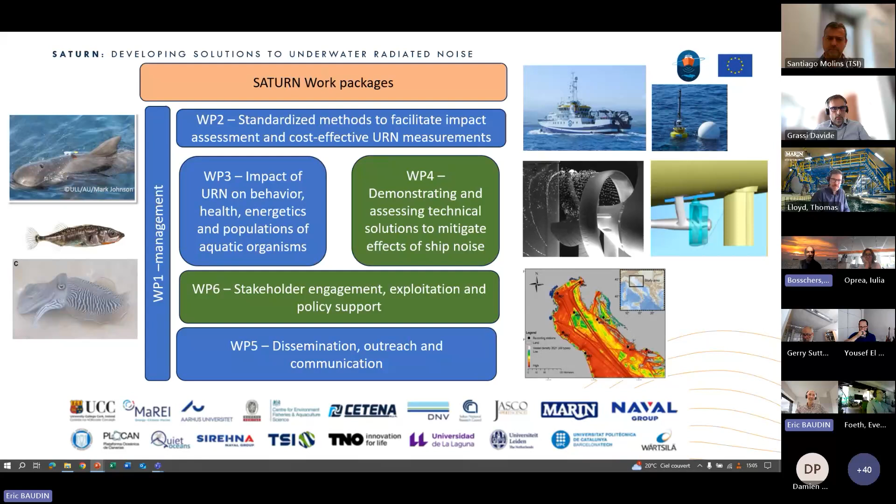I'm senior researcher at MARIN, and I'm coordinator of work package 4 in SATURN on the technical mitigation solutions. This work package consists of 7 tasks, of which we will only address a few in this presentation.

Task 4.1 is on the mechanisms of underwater radiated noise. This research tackles two topics. The first is an experimental study in the cavitation channel of the fundamental physical mechanisms underlying propeller vortex dynamics and associated sound emissions, for propellers in open water condition and in-behind condition. The second topic is a computational study of propeller sound emission of a ship in a maneuver, showing that it's especially the speed loss that leads to an increase in radiated noise.

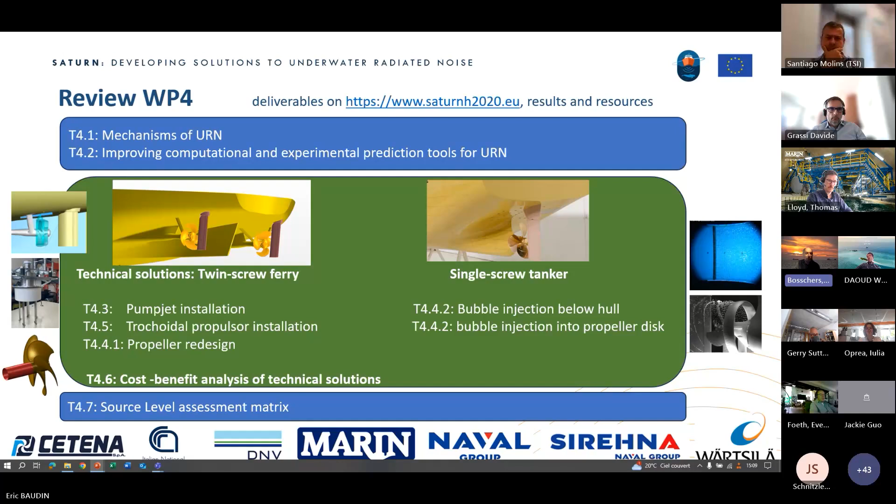We have decided that each technical mitigation measure will be presented by the person most closely involved in it. First for the twin screw ferry, then for the single screw tanker. In addition, some of the technical mitigation measures were also analyzed in work package 6 by a noise mapping study, and two sheets on that will be presented by Eric. This presentation will finalize with the cost and benefit analysis, but we will start first with the presentation by Davide on the design and analysis of the pumpjet propulsor.

Yes, thank you Johan. Good afternoon everybody. I'm Davide Grassi from Cetena Fincantieri. I'm a naval architect in the numerical naval architecture department, mainly involved in propeller and hull optimization.

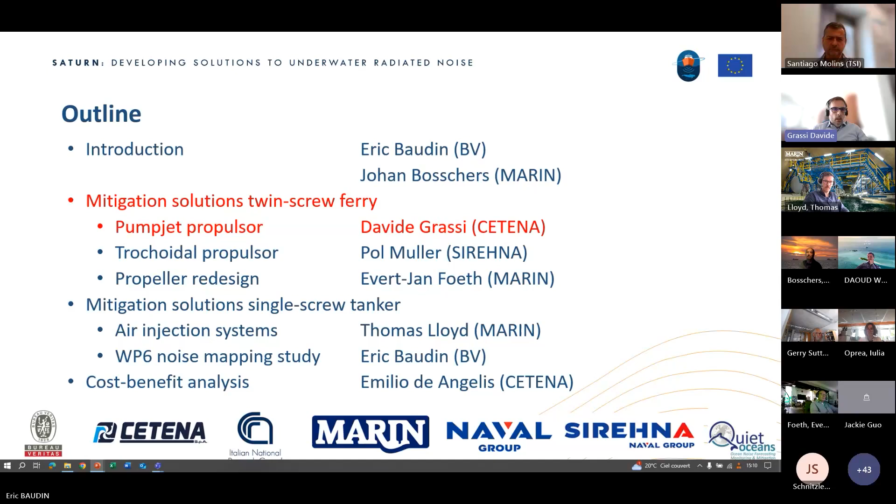Today I will present the pumpjet retrofit design we made for this project. The goal of this task is to design a pumpjet that can be used as a retrofit for the existing propeller installed on a test case ferry ship. The idea is to use a system-based design optimization tool to design the shape of the different parts of the pumpjet, and then analyze and compare both the original propeller and the pumpjet geometry through dedicated CFD analysis and model tests.

With regard to the model test, we performed all these experiments in the large cavitation channel of CNR in Rome, Italy. The scope of this experiment was to evaluate the performance of the original blade and the pumpjet, but also the wake flow, the cavitation pattern, and the emitted noise.

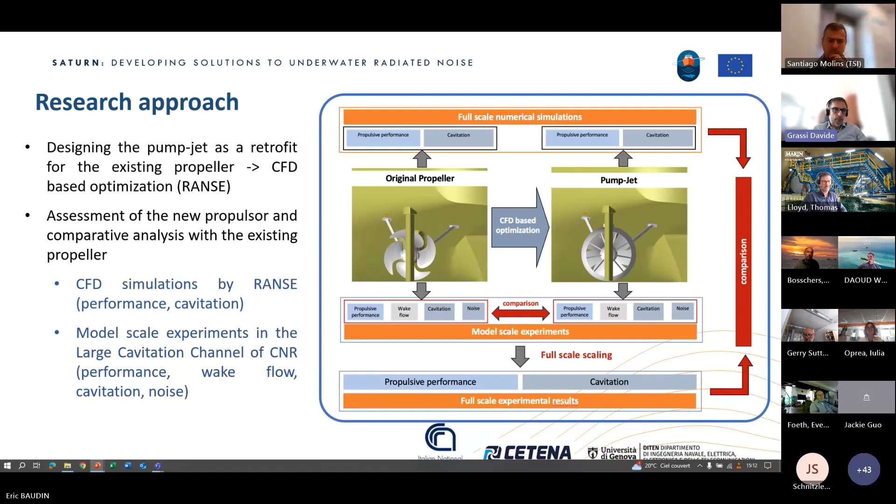Through the CFD analysis, we have the chance to compare the original blade and the pumpjet in full scale, whereas through the experiments we got only model scale results that needed to be extrapolated to full scale.

A few words regarding the design loop applied for this case. We started from a combination of available sea trial data on the existing vessel and model tests. We made preliminary activities, like 3D CAD modeling of the hull, but also preliminary CFD analysis, like the bare hull resistance analysis, which allowed us to use these results as input for the design of the pumpjet.

Besides this, we need to choose a layout of the pumpjet, because for this propulsion tool we have many options. For example, we can go with an accelerating or decelerating duct. In the first case we can gain efficiency; in the second case, by reducing the flow field at the rotor tip, we have the chance to reduce the emitted noise.

We can also choose between a rotor-stator or stator-rotor configuration, meaning the rotor is in the front part of the pumpjet or in the rear part. We decided to go with the rotor in the fore part, upstream of the stator, because this allows us to install the pumpjet more easily on the experimental facility.

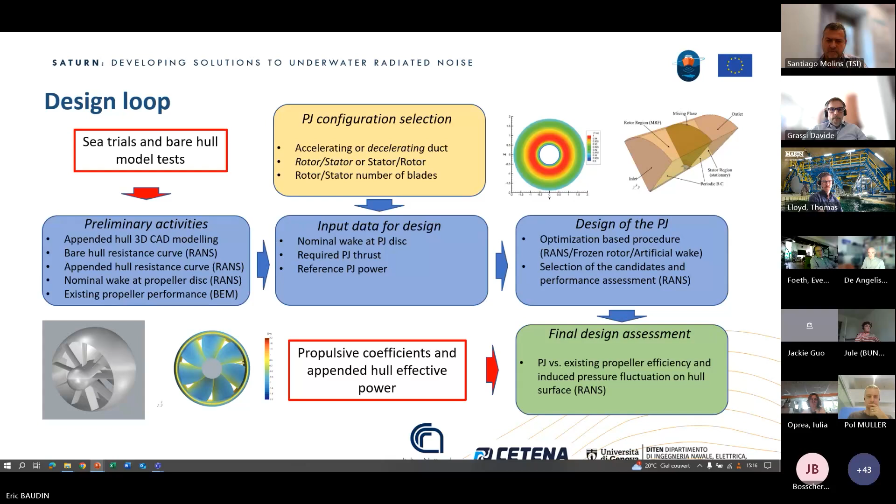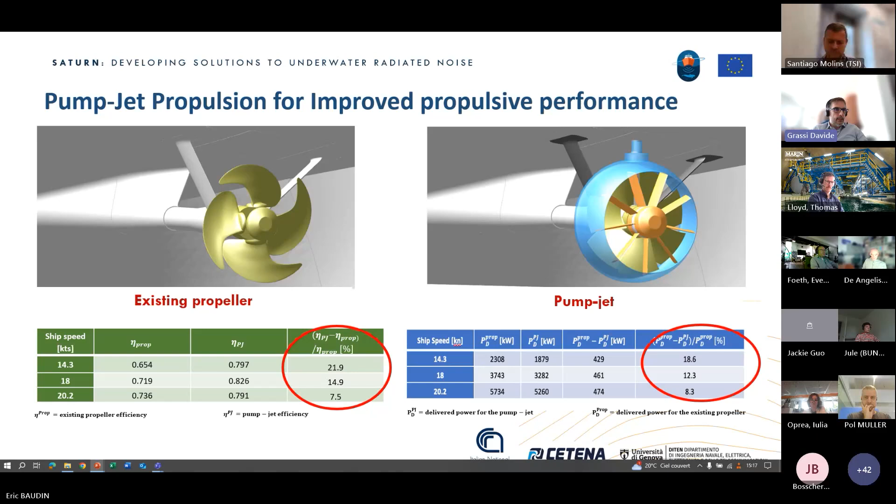We also have to mention that for the lowest speed, the comparison is made with the original propeller running at constant RPM with a reduced pitch. That means that in some way the efficiency of the propeller has a penalty, but we have to say this is the way the ship owner operates this propeller. Next slide, please.

If we have a look at the experiments at the Large Cavitation Channel in Rome, in terms of cavitation pattern but also emitted noise, it's clear that the cavitation pattern of the rotor, in this case, is reduced in comparison with the original propeller.

And if we look at the spectrum of the emitted noise at the 3 speeds we considered for the study, 14, 18, and 20 knots, it is clear that the pump jet shows a reduced level of emitted noise. In this plot, the dotted lines relate to the area where the background noise of the experimental facility is above the measured noise, so in this range of frequency it's not possible to make a comparison.

But in the other region, we have a reduced emitted noise spectrum, except for the high frequency at the highest speed, where the red line, the pump jet line, is above the original propeller. In this region, the idea is that the cavitation coming from the rotor interferes with the stator downstream of the rotor, causing this increase in noise. So we think that in a further study, it's possible maybe to optimize a little bit better in this area.

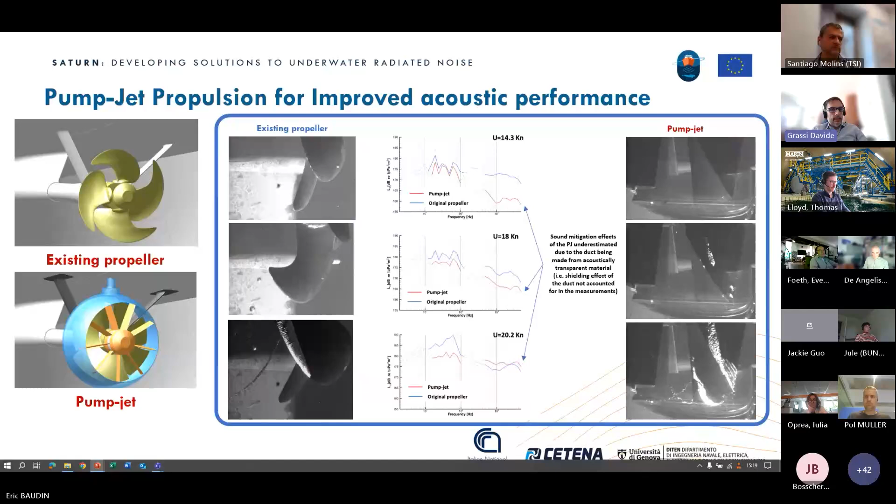Next slide, please. So to come to an outline of this study, the range of ships on which we can apply this kind of solution are, of course, passenger vessels, but maybe also other types of ships. With regard to the effect on emitted noise, we got a reduction up to 15 dB, especially at medium frequencies.

We also have a significant effect on the efficiency of the propulsion system, where we have from 7 to 22% higher propulsion efficiency and from 8 to 19% reduction in power consumption. We think that the technical maturity of this device is quite high, even though we know that this study was only focused on the hydrodynamic part and requires also a mechanical study to be installed on board.

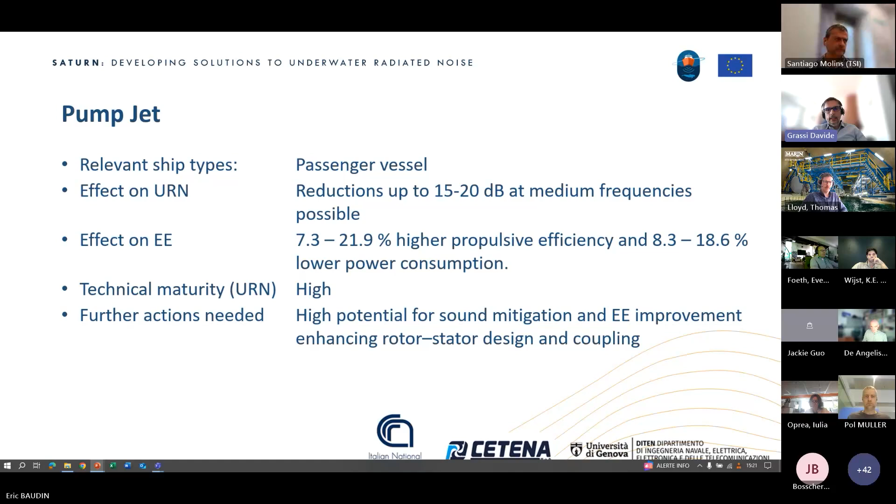With regard to possible further studies, as I mentioned, it will be possible to improve the design of the rotor-stator interference to decrease the noise emitted at high frequency and high speed. That's it from my side.

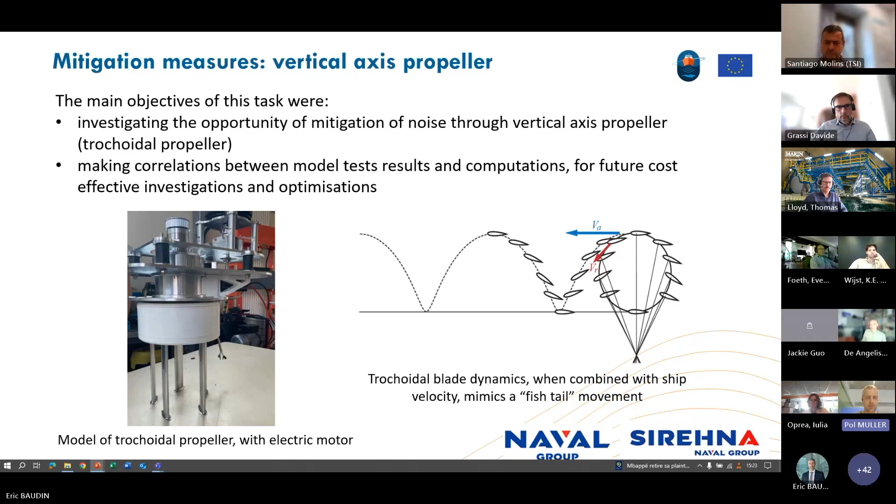This kind of vertical axis propeller is, as the name suggests, vertical axis. You have a view on the bottom left. The blades are vertical and rotating around the vertical axis. Each blade is also rotating around its own axis, and the electric motor is supporting the whole blade assembly, turning around pretty much like a propeller.

When you combine the velocity of the ship with the kinematics of each blade, it produces a kind of fishtail movement. Each blade moves like a fishtail into the flow, which is quite different from a classical Voith-Schneider propulsor system, where the blades are sometimes reversed in the flow, compared to this one, where the leading edge is mostly towards the upstream flow.

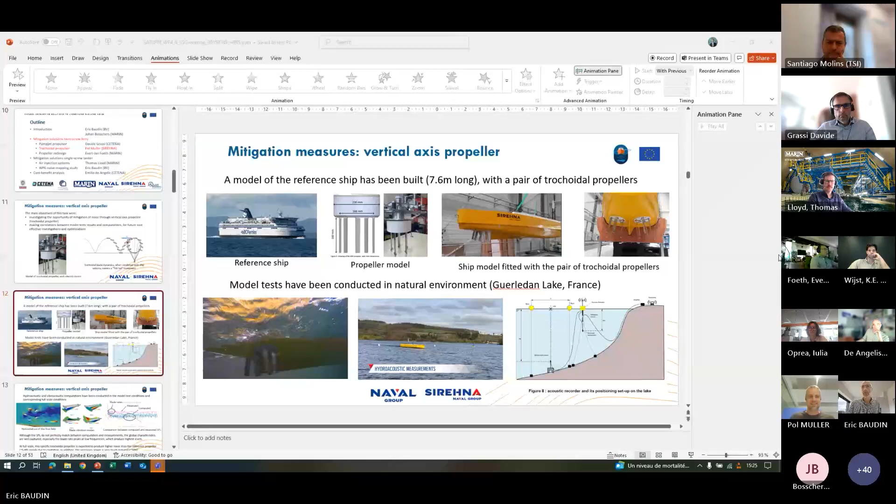Next slide will be difficult to see. Eric is not there. No, I'm there, you don't see me? Oh, I cannot see the presentation, by the way. Can anybody see the presentation, or am I alone? Is it back? Yes, it's back. Thank you very much.

This is what we did. We started with the same reference ship as Davide presented before, and we built a model of this ship 7.6 meters long. We removed all the necessary stuff for the classical propulsion system: the shaft line, the brackets, the rudders.

I have a terrible echo.

We fitted the propeller, the vertical axis propeller, below the ship. The white part you see from the propeller system is the gear system, because it's fully mechanical. There is a single electric motor, and the movement of the blades is completely controlled by the gearing system. This white box is mounted flush to the hull, and then the blades are rotating in the water to produce this fishtail movement.

So we've been testing the model in a lake, a natural environment, and we've been able to measure the noise produced by the ship and the propellers.

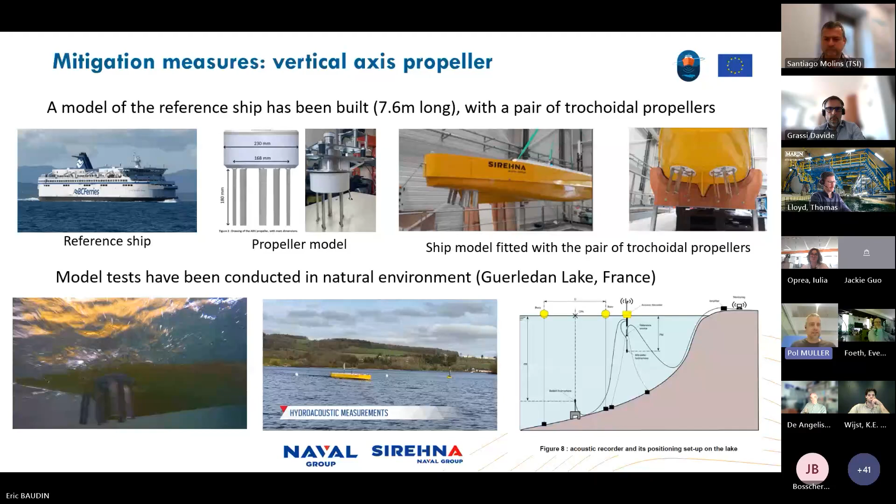This was the first part of the job, and the second part was the numerics. On the next slide you can see what we've been doing. We started with hydrodynamics computations. You can see on the top left corner the horizontal cut of the flow field, crossing the blades, where we can see some nice flow separations.

We've been computing the power consumed by this propeller, its efficiency, and the hydroacoustics of the propeller, plus we've also been computing some vibroacoustic noise, with blade vibration modes computed plus excitation through the boundary layer of the flow on the blades. These three components of the noise are displayed on the right.

The purple line is the noise measured in the lake. The blue line is the pure hydroacoustic noise, and the red and green are the vibroacoustic noise. The main difference is that we don't take cavitation into account in this case, and we did not expect a lot of cavitation in the model, but there was some cavitation, so the noise does not perfectly match.

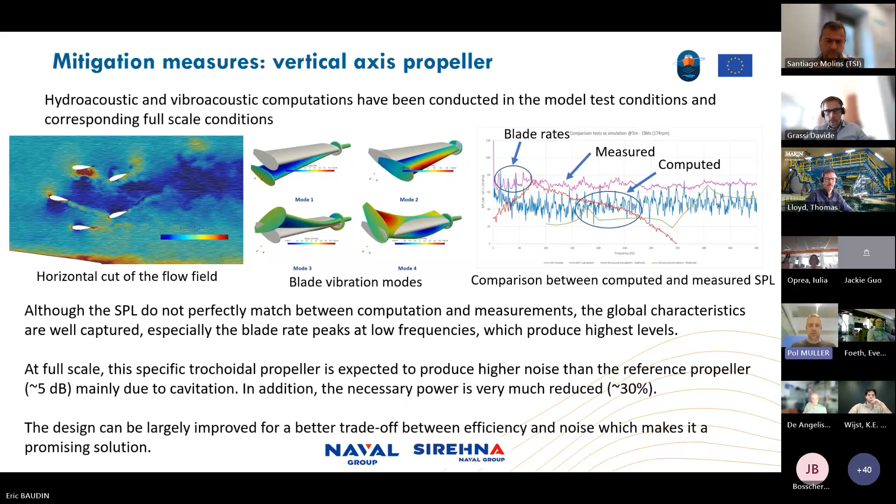So the idea for next is to make a better trade-off between efficiency and noise, because in this case it was a bit more focused on efficiency than noise, this specific design. What we expect is that this is quite relevant for twin screw vessels, because we need a relatively flat part of the ship to install this kind of propeller. So for single screw, it's not fully efficient or fully adapted.

The effect on URN: in this case it's somehow close to plus 5 dBs, but we expect that with a better design we could achieve minus 5 dB. And in this case we have a 30% gain on power consumption, which is quite large.

As you saw, it's still not fully mature. So we still have to make some improvement on the design, specifically for noise. So focusing on a better trade-off between efficiency and noise is the next step for this kind of propeller.

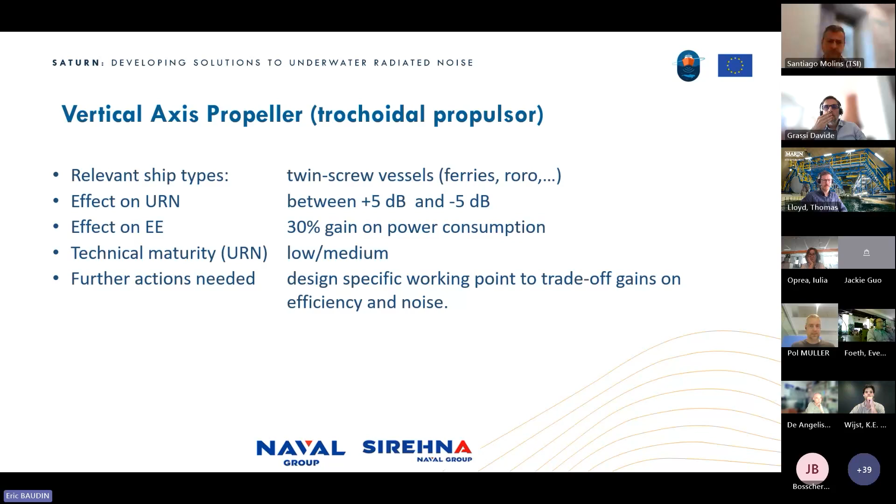Yes, good afternoon everyone. My name is Evert-Jan Foeth. I work as a researcher at MARIN, and I've been working on automated propeller design and optimization for a while. I'd like to present the results for the optimization study where we're trying to balance the efficiency versus the underwater radiated noise properties of the propeller.

The background is that we have two goals, and we are trying to balance these two goals, meaning that you cannot minimize both. One will impact the other. So we're going to balance these, and we use multi-objective optimization algorithms. These are algorithms that are ideally suited to balancing various goals against each other.

We also add a number of constraints, and one of these constraints is the low risk of cavitation erosion. Top right you see a propeller blade which has not been designed well, where the cavitation has eroded away part of the blade surface. So we definitely want to avoid this.

With a few tools - the main tool is the propeller analysis tool called Procal. That's what we use for day-to-day analysis. It's an inviscid method, so no boundary layers are calculated, but you do get a very good estimate of the thrust and efficiency of the propeller and the cavitation extent within several minutes to half an hour.

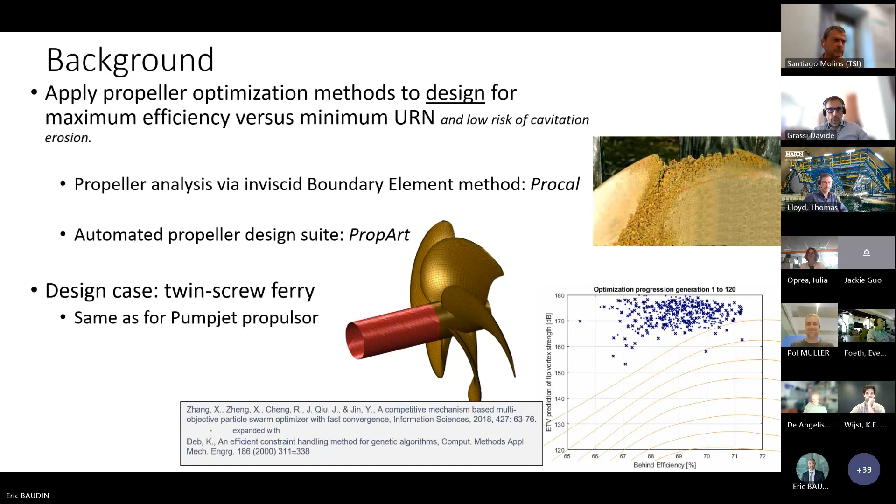And then for SATURN, we also added a parametric hydrofoil function. Normally propellers are typically designed using stock sections, NACA sections, for example NACA 66, very popular, very good cavitation properties. But we also know that depending on the flow behind the ship and other properties, you can tailor the sections further. So we applied a parametric model with 11 parameters per section. The number of parameters for the propeller is quite large - I think we use 50 to 60 design variables, plus this custom section design.

The only thing we do need is to add a flow separation risk estimator, because the code cannot handle that. So this was also added. When we're venturing too much into areas of flow separation, the propeller will give a penalty from the optimizer, and it will be optimized if all goes well.

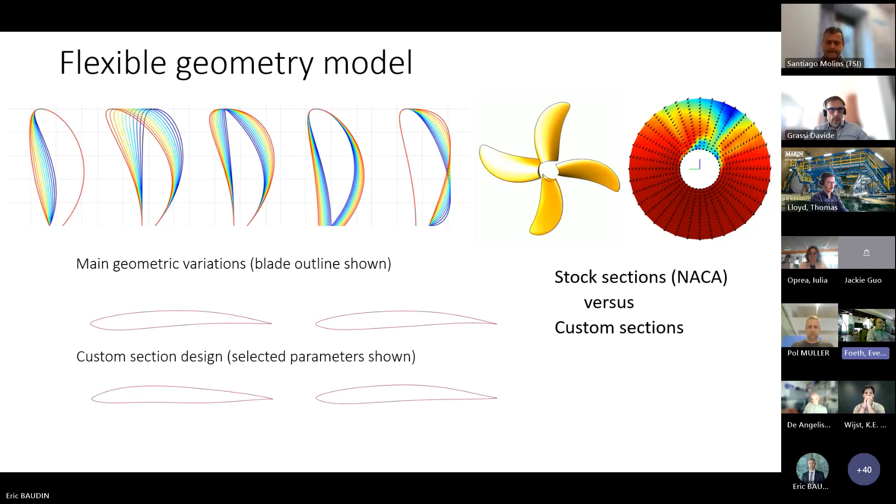Within SATURN, we added several source level estimation functions to estimate the overall source level of the propeller. Each of these functions ties into a specific form of cavitation or noise source. For sheet cavitation, we have the NAVAIS model, a broadband source level estimation model that responds mainly to the entire area of cavitation under the propeller blade. So if you want to reduce it, you need to reduce the cavitating area.

Then we have a tip vortex cavitation model developed by Johan Bosschers. This model depends largely on the tip loading of the propeller. If you want to reduce tip vortex cavitation noise, which is often a dominating contribution, you need to affect the tip loading. And if you affect tip loading, you move away from the ideal loading of the propeller, and your efficiency will suffer.

Then my colleague Eric added a blade rate noise model. This also acts on the sheet cavity, but not on the area, specifically on the dynamics. So it's a more direct method.

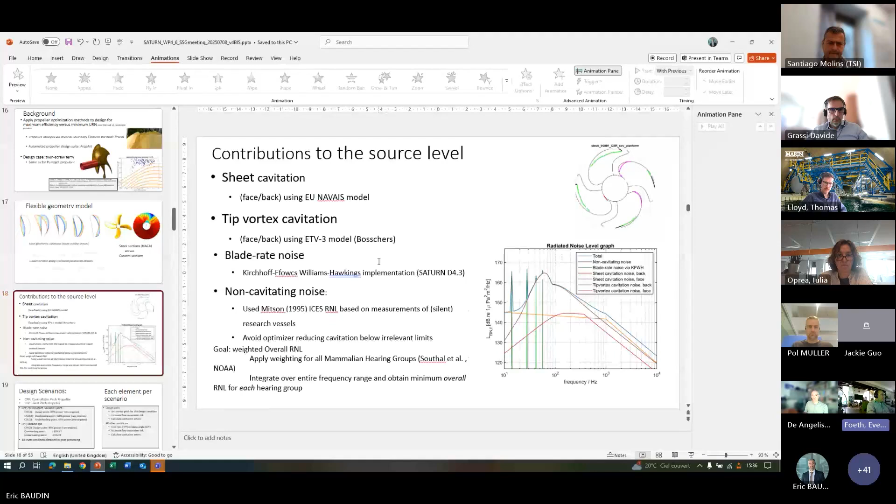And then we added a non-cavitating noise contribution, the Mitson model. This is basically a baseline for machinery noise of research vessels. We added this because we thought we perhaps do not need machinery noise models, since cavitation noise is always louder than machinery noise. But the optimizer was so aggressive in reducing cavitation noise that at one end of the spectrum the cavitation contribution was always lower than the machinery noise. Then it would spend too much time reducing that noise further, even though we were already quite happy.

So we needed a soft landing for the optimizer. That's when we say, well, if you're below engine noise, there's no need to be less efficient. This is why we use this Mitson model. Nowadays we use the PIANO model developed by Jasco, DW Consult, and MARIN, where you can add specific machinery noise components, but that model was not available in time for the SATURN project.

Once we have the entire source level graph, we change this to a radiated noise level. Then we weigh the overall radiated noise level by weighting groups for various mammalian hearing groups from Southall and from NOAA, for example baleen whales up to harbor porpoises and so forth. Then we integrate everything and get an overall radiated noise level for these hearing groups, and we minimize the loudest outcome.

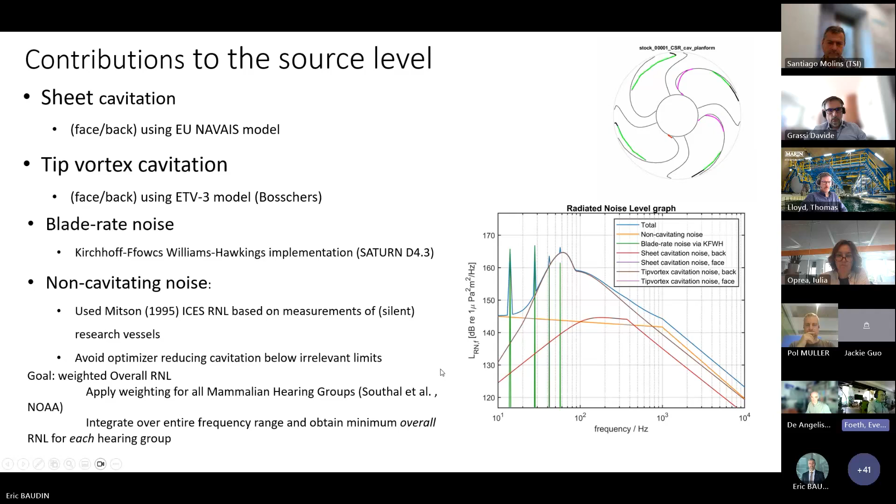Now everything is applied in all these calculations for each propeller that we design, in several design scenarios. We analyze the controllable pitch and fixed pitch propeller. The ferry is fitted with a controllable pitch propeller. Then we have several design conditions: the ordinary service speed, where it uses two engines and runs at 85% power, the continuous service rating, but it can also go to its maximum speed of 20 knots, using both engines.

We also added a winter condition, where ferry speed demand is less, one engine might be turned off, and we go to 85% power, meaning the controllable pitch propeller's pitch is reduced, introducing the risk of pressure side cavitation, which is added as a constraint. For the fixed pitch propeller, we have comparable conditions: 85% power, basically the continuous service rating, 20-knot condition. We added two conditions with over- and underloading to ensure the design is robust. This ferry will probably not operate at these points, but it's just common good design practice.

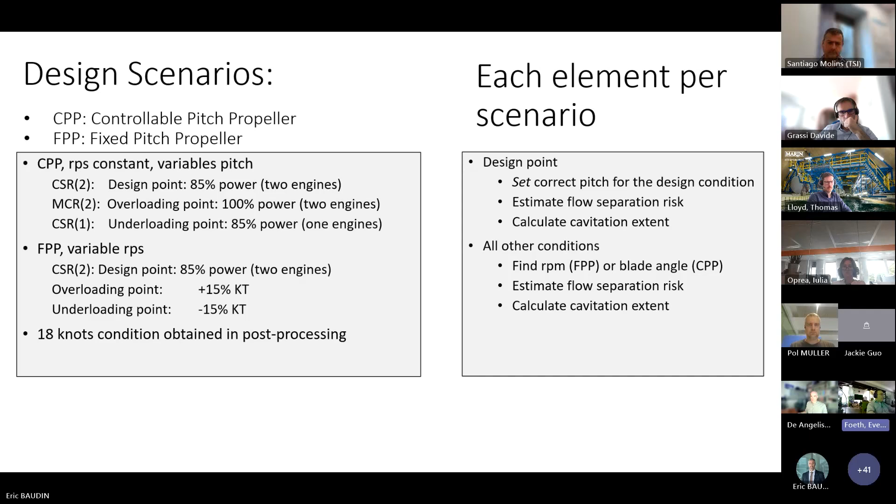And then we do a number of calculations. I think we do 9 calculations per propeller, and then we do 6,000 propellers for each scenario.

So this is the result of one of these scenarios, the 4-bladed controllable pitch propeller. The original propeller also has four blades, and this is the last generation. When all is said and done, we get the Pareto front, which is really the boundary in your design space, telling you that you cannot improve your efficiency any further without giving up some of the radiated noise levels. The black dot on the left is the reference design. For the same efficiency, I only win 1 dB, which was fairly modest at first.

We can also not make the propeller worse to reduce the noise further, because then we go to the off-design condition where there is pressure side cavitation, and we cannot combine these two conditions. So the low speed pressure side condition and the maximum speed condition box in your design space, and you have no more room.

We also analyzed the reference propeller, and we found that it has this magenta outline that is face side cavitation. So this is an older design that suffers from face side cavitation. It's not something that you would do anymore. This propeller has been replaced meanwhile.

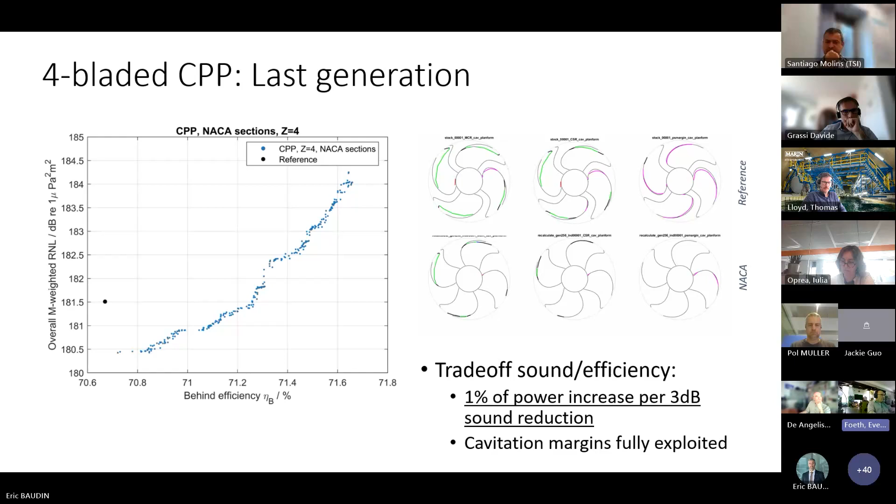We also find that if you want to reduce your overall noise levels by 3 dB, you have to sacrifice about 1% of your efficiency, so that will cost you 1% of power increase. At first we were careful and would say this only applies to this particular ferry. But this relation, 1% power for 3 dB of sound reduction, we have now found in 4 separate studies, also for a single screw container vessel and a chemical tanker and so forth. So as a rule of thumb, it's a good indication.

Now here's the Pareto diagram where we have 4 of these scenarios in one graph. The blue one is the same one I showed you earlier, that is for the controllable pitch with 4 blades. If you go to a 5-bladed propeller, the optimizer is immediately able to add 1.5% of efficiency without sacrificing anything in noise. The orange and red dots are the solutions for the propeller where the section design was also varied.

We see there is a massive increase in your design, the design space is used much better. So you can drop almost 10 dB for the same efficiency, and you can also increase your efficiency a lot more for the same noise contribution. So within your design space, adding this custom section design offers you a lot of space.

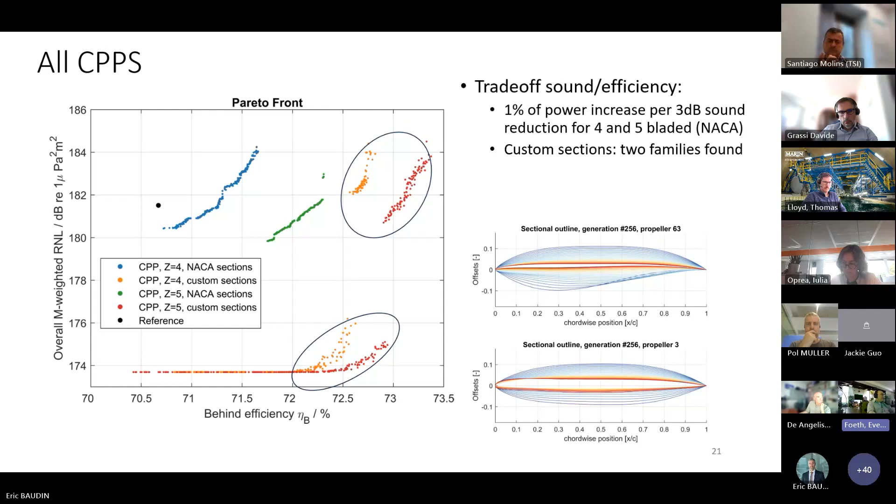Now I showed you that we only had a 1 decibel increase or reduction in sound levels for the same efficiency, but that was for 20 knots. When we look at the 18 knots condition here at right, we see that even with the NACA section, the optimizer is able to shave off 6 dB of noise, and a lot more for the custom section design. Unfortunately, we found out that the blade mass at the suction side of these sections has more than doubled, so you would not be able to simply replace the blade and put on a new one, because then it would exceed all the manufacturing and safety tolerances of the hub.

However, for such a future design where you want to really exploit the entire design space, if you would use composite materials that have no such weight restriction, then you would be able to make a much quieter propeller with no loss of efficiency.

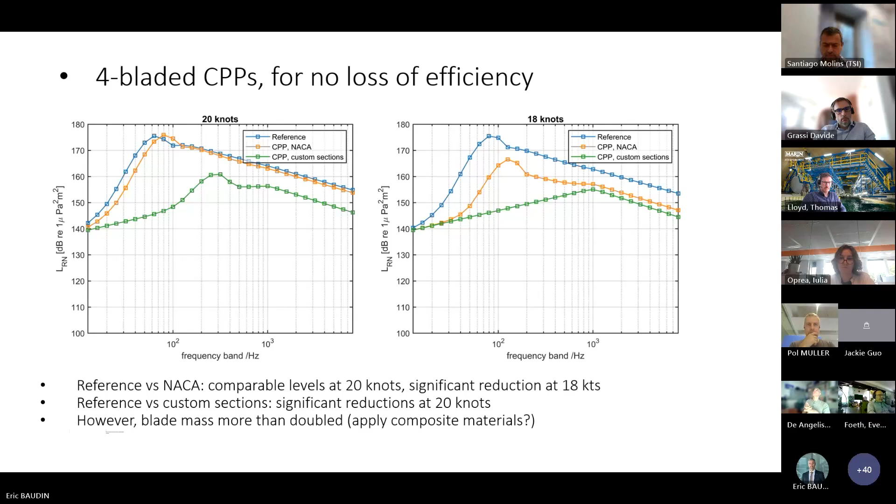So, general overview for the propeller redesign. The relevant ship types are of course all ship types, because we can apply this procedure to any type of ship, vessel and propeller type.

We do see that the effect on underwater radiated noise for the standard designs, we can reduce between 3 and 9 dB at the cost of efficiency, though for the custom section sometimes the levels drop by 20 dB. We do see that the efficiency and underwater radiated noise are negatively correlated, so for every 3 dB you lose about 1% of your efficiency for the same type of propeller.

But fortunately you can combine it with the air injection system, the prairie-like system where we have injected air into the propeller disc, where we noticed that in the lower end of the frequency range the noise levels would go down. So with such an air system you might be able to increase the cavity volume, dial up the efficiency without any negative influence on the overall noise.

So technical maturity is high, we are using these methods on a day-to-day basis. And there are of course a few outstanding actions, things that we need to improve on. One, the optimizer is relatively quick, but not a lot. We shared the optimization method with several propeller manufacturers, and they do complain that the lead time is sometimes a bit too long.

So we are looking into a next generation of optimization algorithms. Now we are missing a few of the underwater radiated noise prediction tools, so that we are also working on. And for the future, we're going to couple it with high fidelity tools.

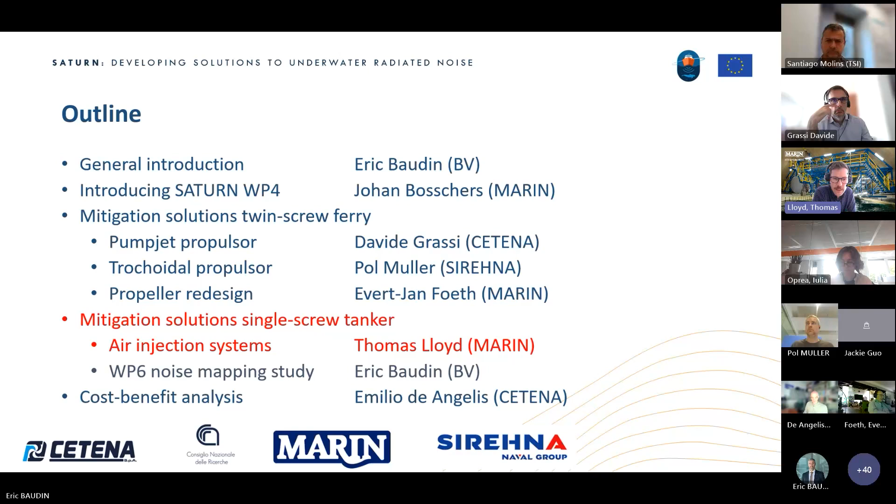I'd like to briefly present our work on air injection systems for reducing underwater radiated noise. We looked at two types of systems. One is the so-called masker system, which injects an air bubble curtain around the ship hull in order to isolate the vibrating hull plating from the water, with the aim of reducing machinery noise. The second is the prairie-like system, where air is injected into the propeller disc with the aim of having the air enter the cavitation and thereby dampen the collapse of the cavity bubbles, which is the main noise generation mechanism of the propeller.

While these two systems are designed to reduce noise, we see a clear synergy with approaches for improving energy efficiency. In the case of the masker system, you can imagine combining it with an air lubrication system, thereby achieving both a reduction in vessel resistance and machinery noise. And in the case of the prairie system, we think it could be combined with, for example, a pre-swirl device or a wake improvement device, which could be used to house the air injectors.

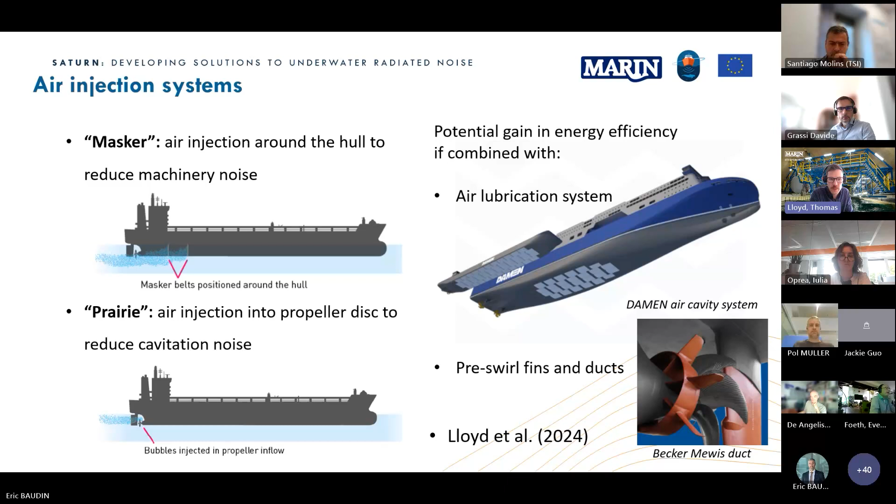Just covering the two air injection systems briefly: we made this ship model and tested it in our facility, our depressurized wave basin facility. The model was made to vibrate using a shaker, which you can see on the bottom left of the slide, and we injected the air through porous hoses, the black strip on the model. The video you can see now is a high-speed recording taken from underneath the model as it sails through our tank, and you can clearly see the air bubble layer which is generated there.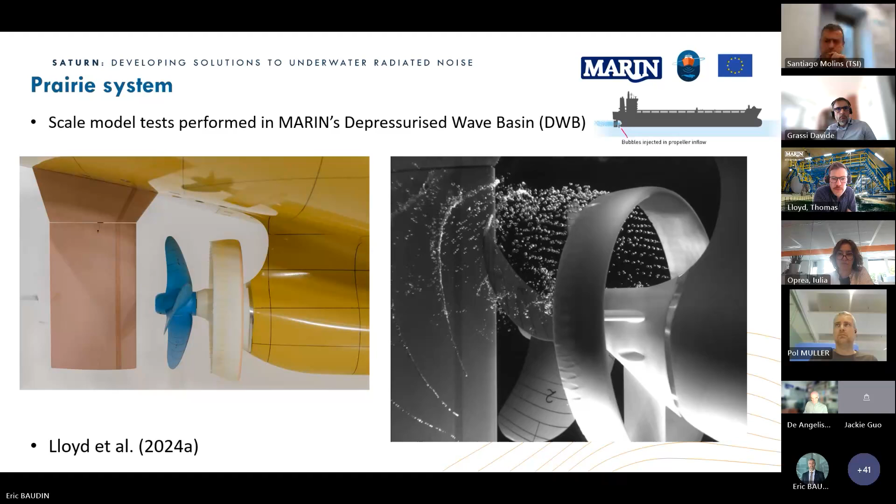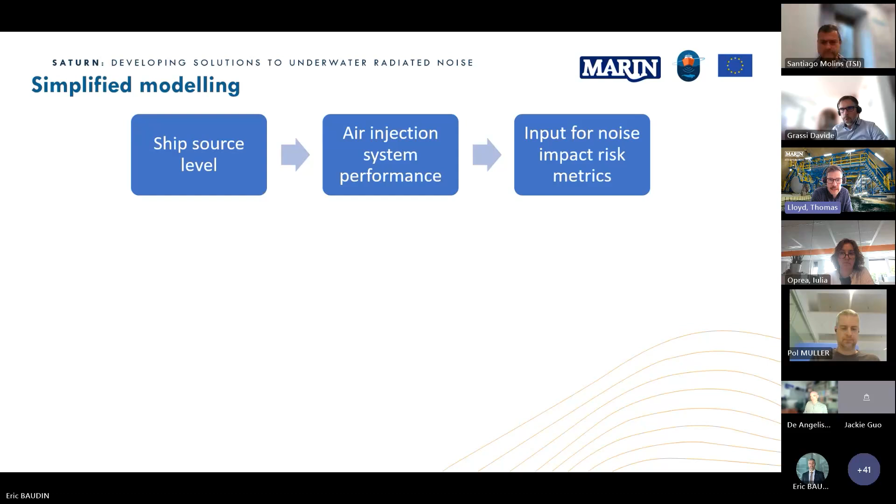So we took this information from our model scale experiments, and we came up with a simplified procedure to model the effect of air injection on ship source levels. It's quite simple: we have a model for the sources, so propeller cavitation and machinery noise. Then we have the air injection system performance, derived from the model tests, and we combine these to come up with the change in source level or radiated noise level, which can be used to assess the noise performance.

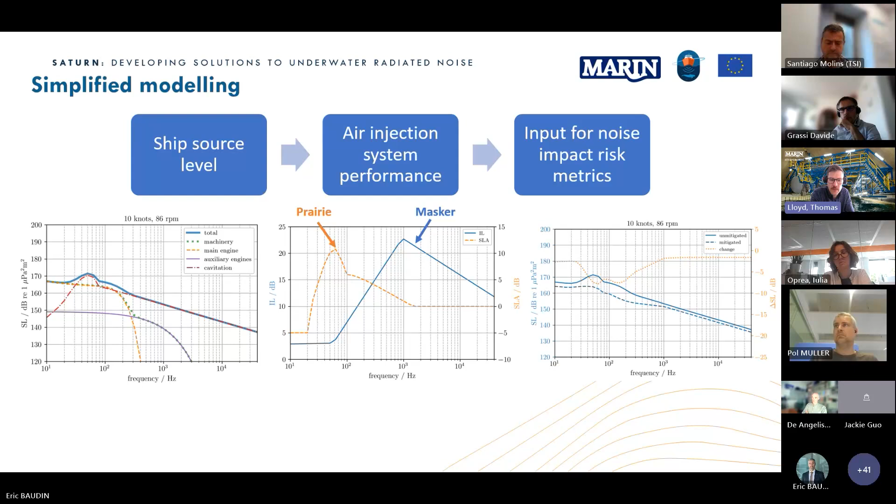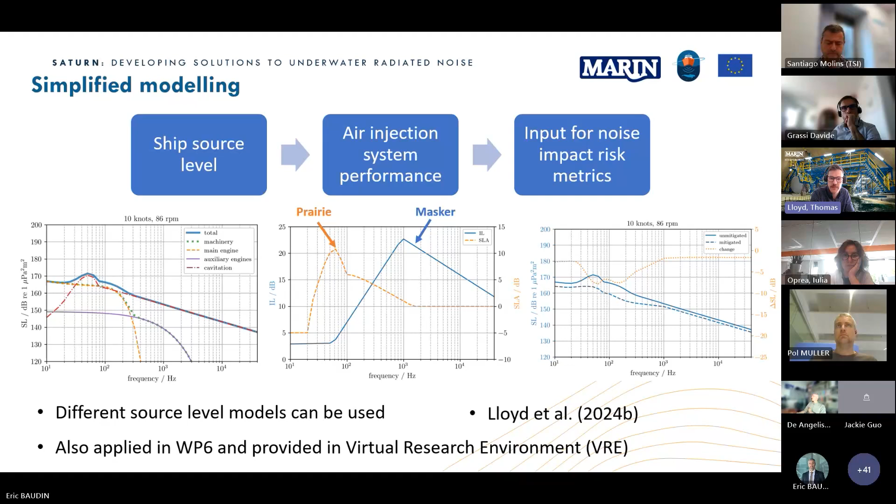And this reduction, this delta source level, is shown here on the right-hand y-axis. This simplified procedure has been applied in work package 6, which Eric will shortly present to you. A script has been made available in the virtual research environment so it can be applied by other researchers in future studies. If you'd like more information, you can find it in the references included in the presentation.

So just to summarize about the air injection systems, for the masker system, we think it can be applied to a wide range of ship types, although you need to have a decent amount of flat bottom, particularly under the engine room. We saw reductions of up to 20 decibels in terms of underwater radiated noise, although this was focused at medium frequencies, by which I mean about 500 hertz to 2 kilohertz.

We also measured a slight performance degradation when using the air injection system due to air bubbles flowing into the propeller, but we think this will be more than compensated when combined with an air lubrication system. In terms of technical maturity, we assess it to be medium, since similar systems are already used on naval ships, but there's certainly room for improvement in the present application to commercial vessels.

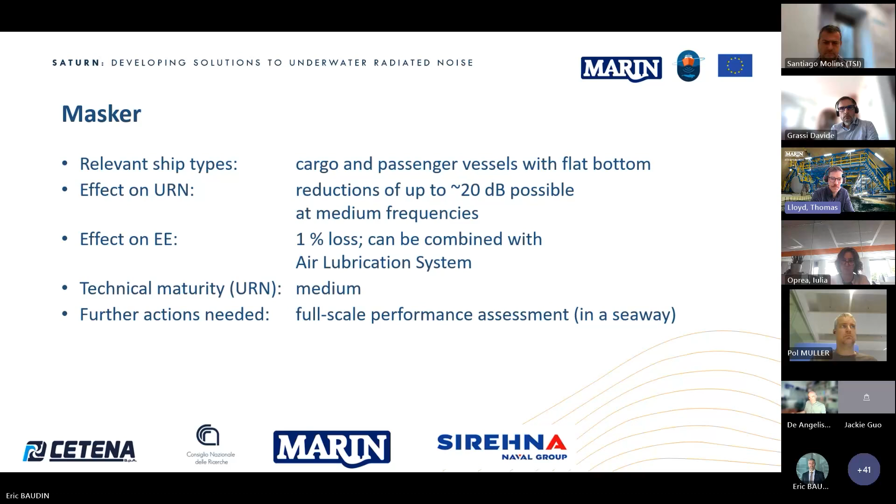And in terms of future work, we think it's important to test the technology on full scale, paying particular attention to the effects of vessel motions, so sailing in waves, for example, and how this will affect the bubble curtain under the ship hull.

And for the Prairie system, it can be applied to most vessels, focusing on those with a screw propeller. The reduction in underwater radiated noise is up to about 10 decibels, and this is focused mainly at lower frequencies, since the system primarily reduces the characteristic hump in the underwater radiated noise in the source level spectrum for cavitation.

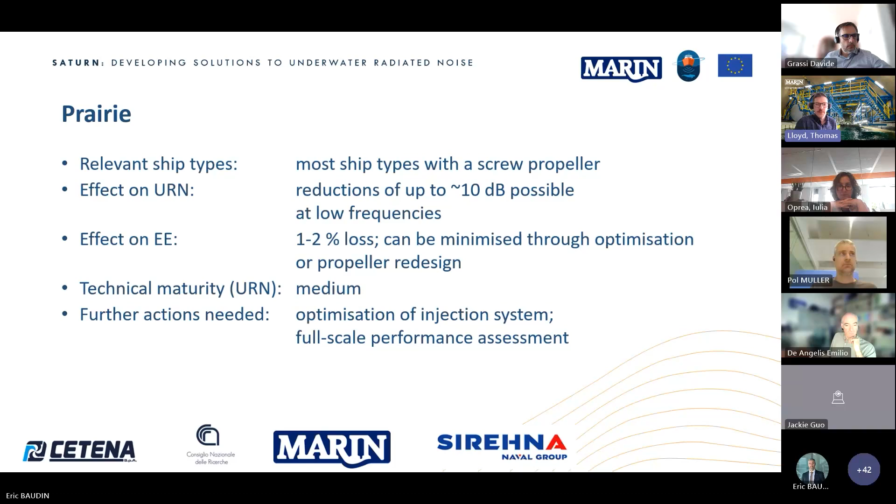We also measured a slight performance degradation for the Prairie system, but we think this can be removed by optimizing how the air is injected, or combining the Prairie system with a redesigned propeller, as Evert-Jan mentioned earlier. Again, maturity is medium, and as I said for the masker system, a full scale assessment would be a logical next step. So that concludes my part of the presentation, and I'll hand over to Eric to talk to you about the work package 6 noise mapping study.

Thank you, Thomas. Thank you very much.

Let me quickly give you this overview. This is the work from Quiet Oceans, namely Thomas Folegot and Robert Chaban, and I have to give credit to them, even though they couldn't manage to attend today's meeting.

The work performed here consists in integrating the output of some of the technical solutions that have been presented at ship level, and then implementing them at larger scale to quantify the benefit of such solutions in a given area with a given ship traffic and a given time window.

The three solutions you are now familiar with, I would say, are the optimized propeller, the masker, and the Prairie systems, and the combination of those three have been simulated. In the project, three geographical areas have been studied, and I will illustrate with one of them, the English Channel.

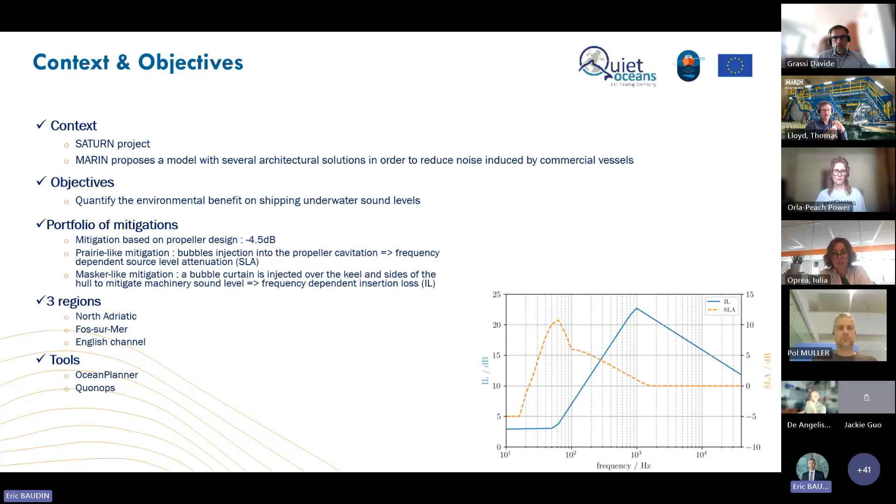So you have to bear in mind that this work means different frequencies have to be simulated. First, because as you have seen before, the solutions' efficiency is frequency dependent—they are not even for all the frequencies. And of course, because the possible impacts on the fauna, since the main objective is to reduce the impact on the marine fauna, are also frequency dependent.

So this work is simulated for different ship types, different solutions, different time windows, so time statistics, time percentiles, and at different frequencies. Here on the right side are given some of the results at two time window considerations, so 5% of the time and 50% of the time, half of the data time window analyzed.

What we can see in the English Channel presented here—we don't see it, but believe me, tankers and cargoes are a large part of the fleet in this area. On the left part, these are the results for the Prairie system, and we see that the Prairie system mitigation has had the highest impact on source level mitigation, which is why it's presented here. The mitigation effect is very strong, up to 10 dB half of the time for the combined solutions.

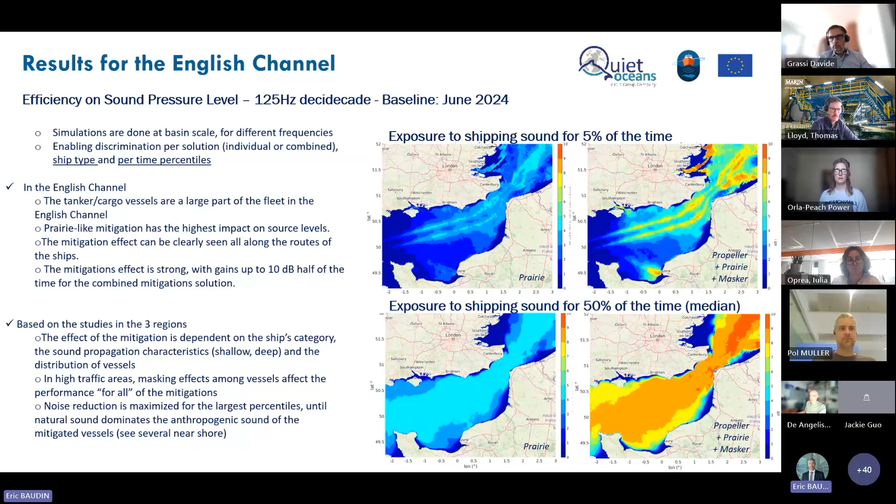But the purpose is just to illustrate that from a technical design solution at ship level, the next step is already mature: assessing this technical solution at a basin scale. So I give back the floor to Emilio to conclude the presentation with the cost-benefit analysis of the previous solutions.

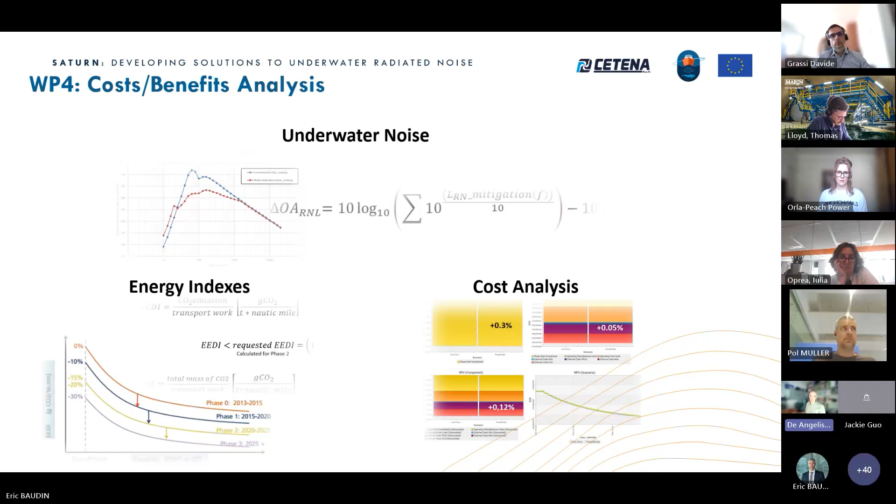So we start from the methodology we followed for underwater noise performance. First of all, the radiated noise level has been calculated by each partner that studied each mitigation solution. Once we defined the reference operating condition, we obtained a spectrum for the baseline ship and a spectrum for the mitigated ship.

Then these underwater noise data have been compared both as spectra and as an overall value. The overall value, as you can see in the slide, has been obtained as a logarithmic sum of the whole frequency spectrum of the spectral components. And as you can see, a difference is then calculated. This delta has been assumed as the reference of the improvement obtained.

This overall value improvement has also been calculated by applying different weighting functions that correspond to the different sensitivity of different marine species, as shown in the second formula.

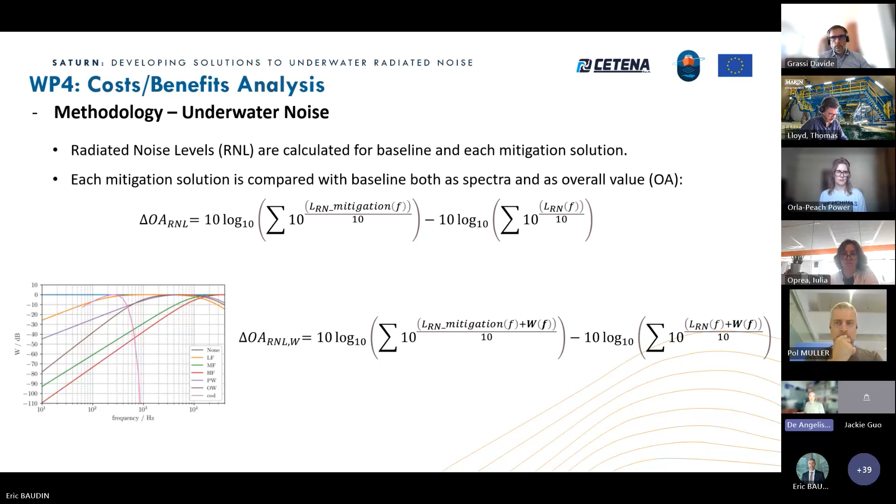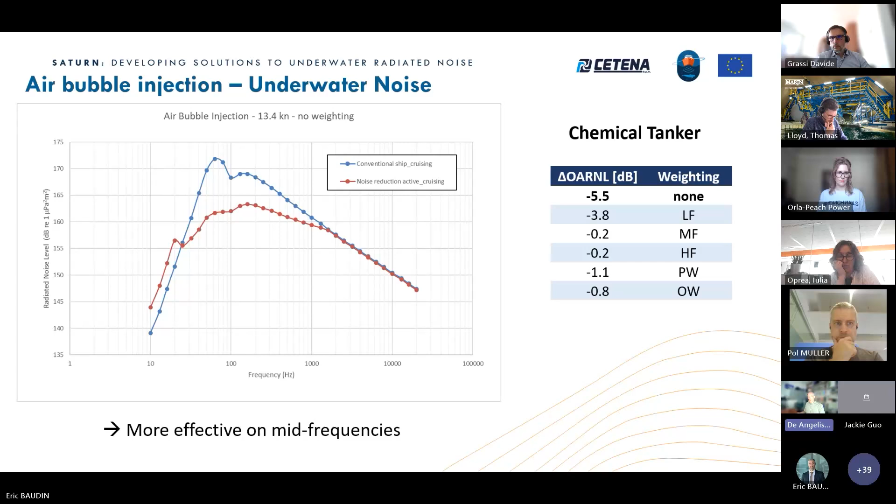If we move to the next slide, we just do a quick overview of the results for each technological solution, and in the end we will see a full comparison among all of them. You can move through the slides. We can see different spectral behavior, but in the end we compare the overall result.

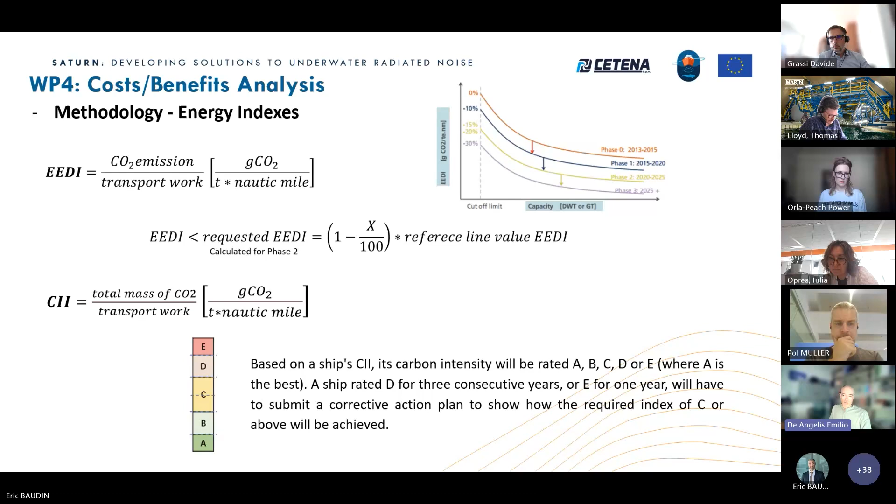Then coming to energy efficiency, we assumed as reference the traditional and well-known indexes: the energy efficiency design index and carbon intensity index. We won't go too much into details now. You can see both of them express a ratio between the amount of CO2 emitted into the atmosphere and the so-called transport work, meaning the ship capacity multiplied by the distance the ship sails.

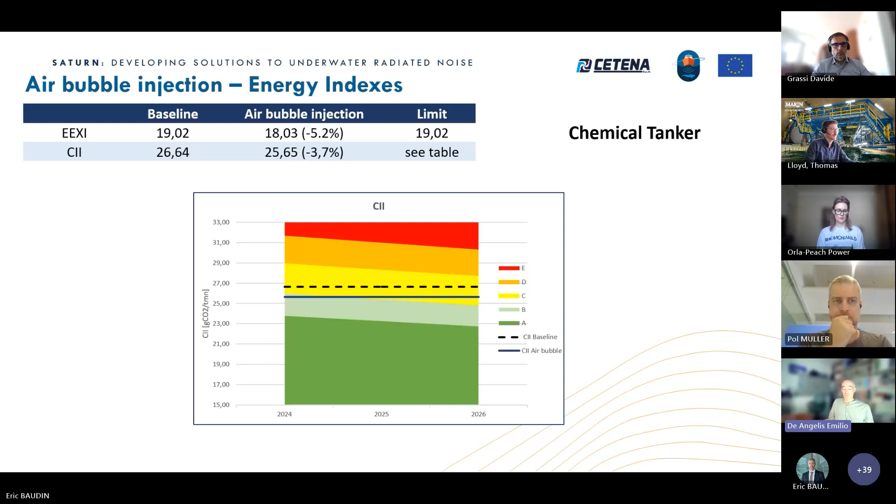Also here we have a quick overview. We can see good results from the energy point of view for all the solutions studied. So we can move to the next slide. Here in propeller optimization, we declare that the energy efficiency is unchanged, but this was an assumption in the optimization process that has been well described before.

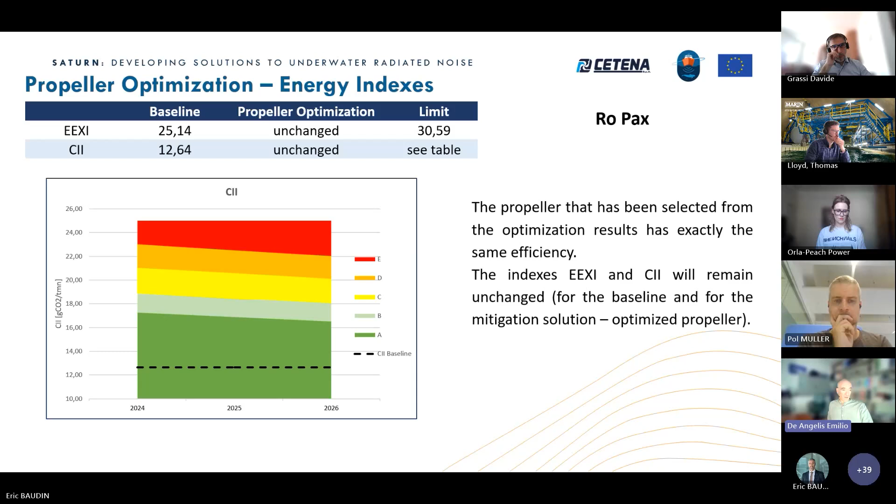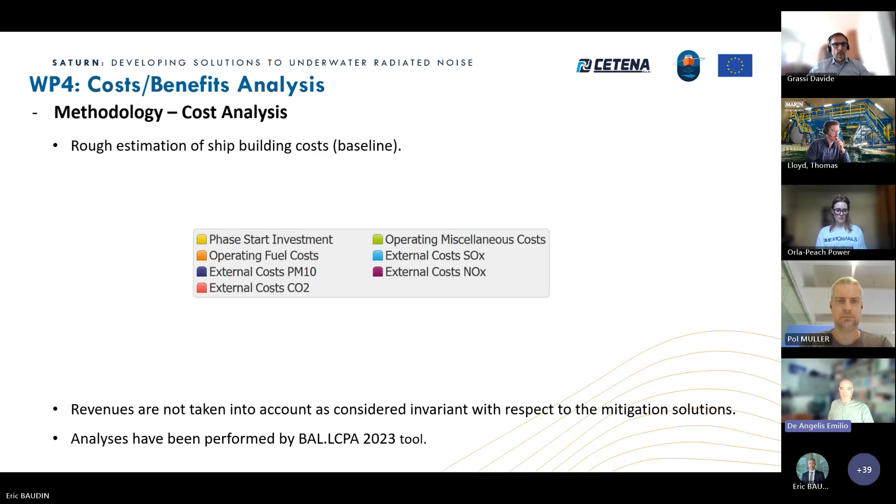So I think we can move to the cost part of our analysis. It seems some word is missing in this slide—oh sorry, I don't see the presentation anymore. Okay, sorry, I'm back.

Concerning the cost, we started from a rough estimation of the shipbuilding cost, and we performed an estimation of the delta cost necessary for the implementation of each mitigation solution. Then we also estimated the life cycle cost, both for the baseline ship and for the mitigated ship. In this life cycle cost, we took into account not only the initial investment and traditional operating costs, but also a quantification of external costs due to each pollutant emitted into the atmosphere.

So as a KPI for each mitigation solution, in the end we calculated CAPEX, life cycle cost, and the net present value of the life cycle cost, that is the life cycle cost discounted to now. The last thing that it's important to point out is that revenues have not been taken into account in the life cycle cost analysis, since we consider the revenues as invariant with respect to the mitigation solution.

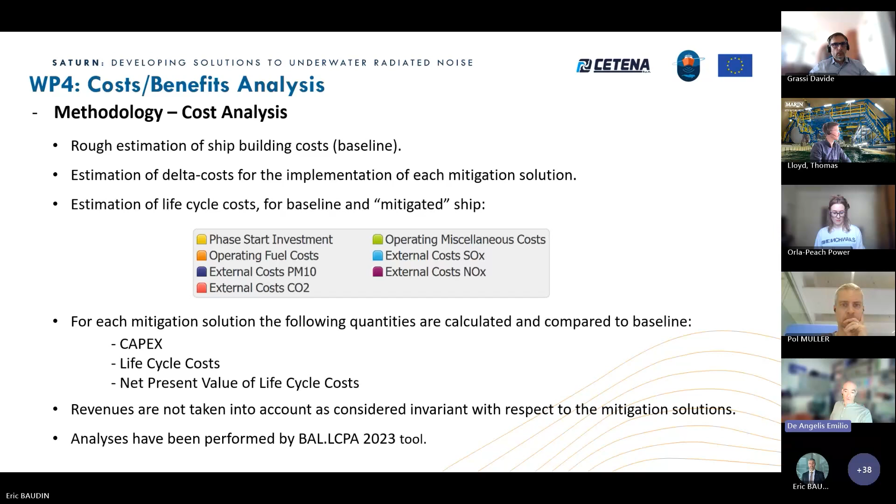We note that this is not completely true, because, for instance, a ship that is better performing from the point of view of noise can access different areas, can have discounts on port fees and so on, but we didn't take that into account in this evaluation.

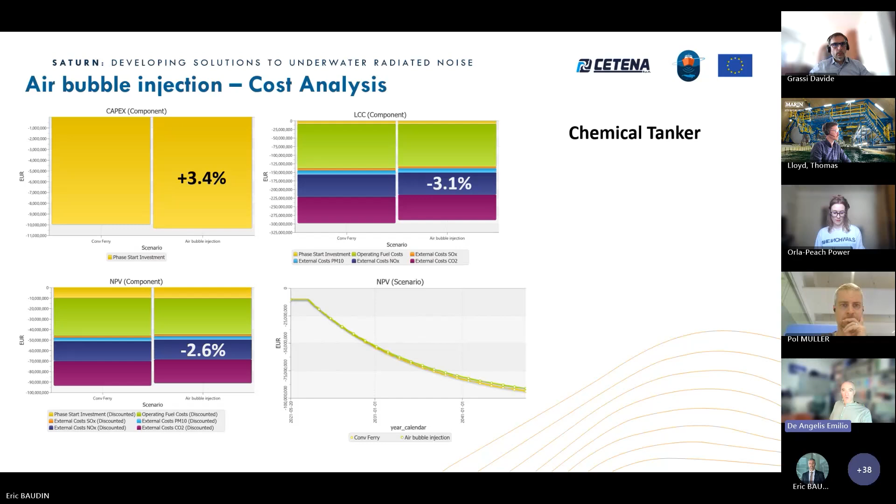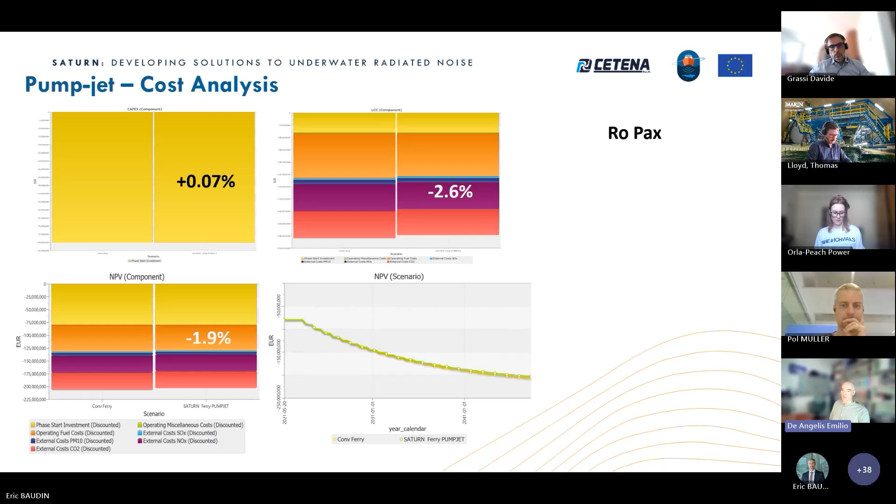So moving to the next slide, here you can see, also in this case, we don't go too much into the details. We can see something very similar for each solution, that is an increase in CAPEX, but a decrease in life cycle cost and discounted life cycle cost.

That means that it's possible to have a payback of the investment cost within the life of the ship. So in this last slide, we have a comparison among all the different mitigation solutions, and we can see what I briefly described before in the previous slide. So we can see an improvement from the energy efficiency point of view between 3 and 6%, let me say.

The only exception is propeller optimization, but as we have seen before in the presentation, we assumed that for this comparison to maintain efficiency invariant for the propeller that has been optimized.

From the point of view of radiated noise level, also we can see improvement for all the mitigation solutions we compared.

Something different for vertical axis propeller. Here in this summarizing slide, we put the worst performance, but as Pol has explained before, there is still some optimization to be done, and we can foresee better results also for the vertical propeller.

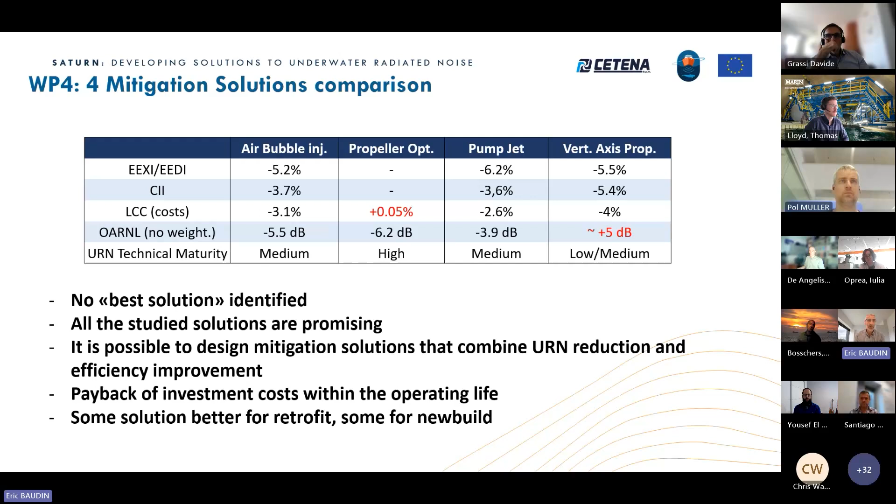Thank you, it's really interesting. Thank you, Chris, for your good remark. And together with the next months, let's say, all these solutions being more broadly adopted will also cut down the cost of this solution, as far as any innovative solution is at the beginning of its implementation. The cost is of course high, and the more is produced, the better. Normally the cost is dropping down as well. So all in all, it will be much more engaging for our ship owners.

Any other question from the floor? I check in the chat. Yeah, Yousef, if you can take the mic, if you don't mind. Yeah, I can explain the question if that's easier.

Yes, thank you. It's just that, as I put there, the updated IMO guidelines on underwater noise say we shouldn't reduce noise at the expense of GHG. And certainly this work, and other work I've seen, basically says you can have a quiet propeller, but it comes at an efficiency cost, and you would increase your GHG. So it seems like one contravenes the other, unfortunately.

And I know there's been some discussion on air lubrication, but my concern is that we're saying, well, here's a solution, but you need this add-on to mitigate the negative effect of that solution, and we're just continually adding cost. And there are some interesting comments there with regards to, for example, EEXI.

I'll tell you, I work for Canada Steamship Lines. We're currently looking to build two new ships. They're going to be copy-paste of old ships, same trade, same dimensional constraints, but now we're in 2025, so it's EEDI phase 3. The shipyard said, well, simply then the ship's going to go slower. If you don't want to spend all this money on all these other fancy technologies, your 14-knot ship is now a 12.5-knot ship.